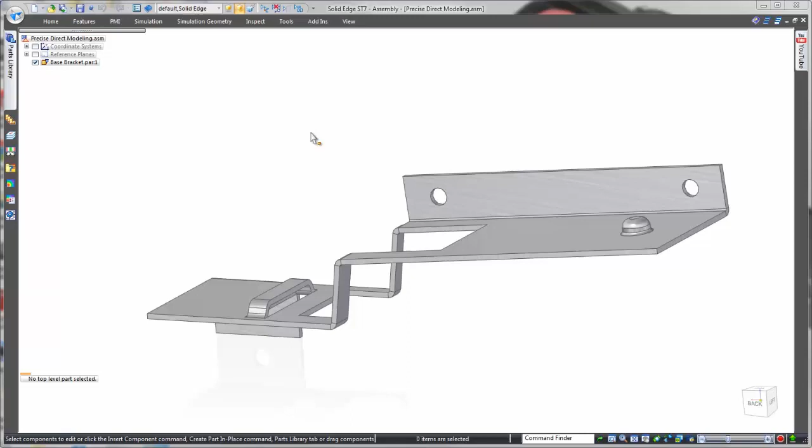So you've seen how Solid Edge with Synchronous technology allows us to rapidly create initial designs. That's the beauty of direct modeling. But what about finalizing that design with precision parametric work? Synchronous technology gives you the best of both worlds: fast direct modeling and precise control.

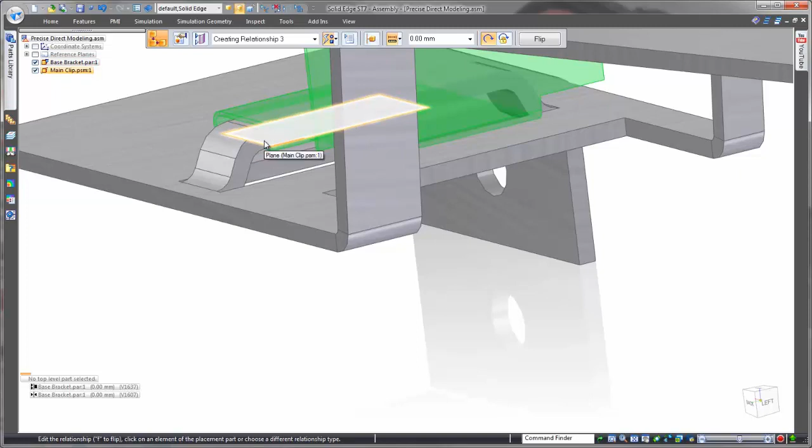Here we'll take our spring clip concept and ensure it fits and ready it for its detailed drawing. Let's take a look at how this will work inside Solid Edge.

Here we can assemble this clip to our base part simply by selecting a few faces. Simple drag and drop, and Solid Edge knows what to do next. Definitely a time saver when working with hundreds of components. I have this roughly where it needs to be. I can come back and get this exact when I start seeing the bigger picture.

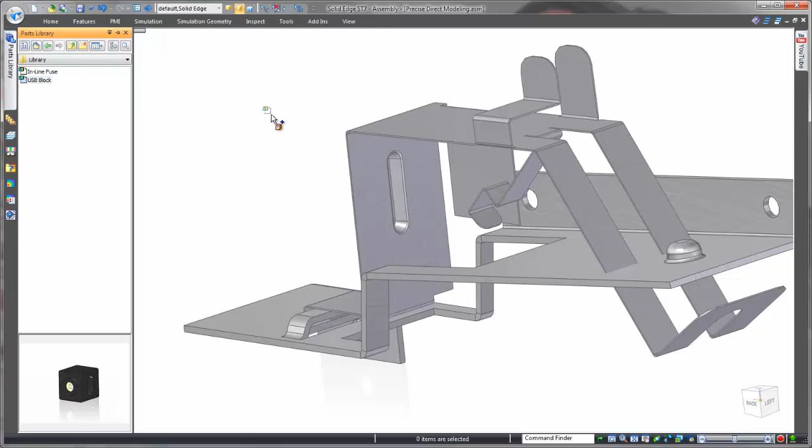Here we need to assemble this USB block so we can tell just how much change we need to make to the clip. Notice all the nice visual feedback Solid Edge is giving me when selecting faces and axis of cylinders.

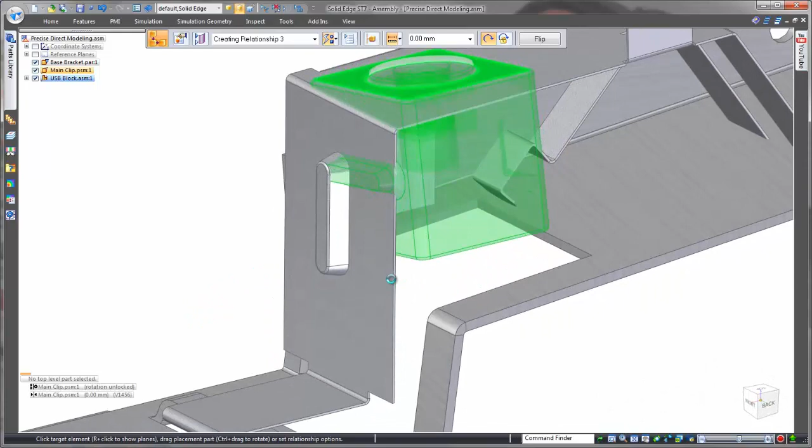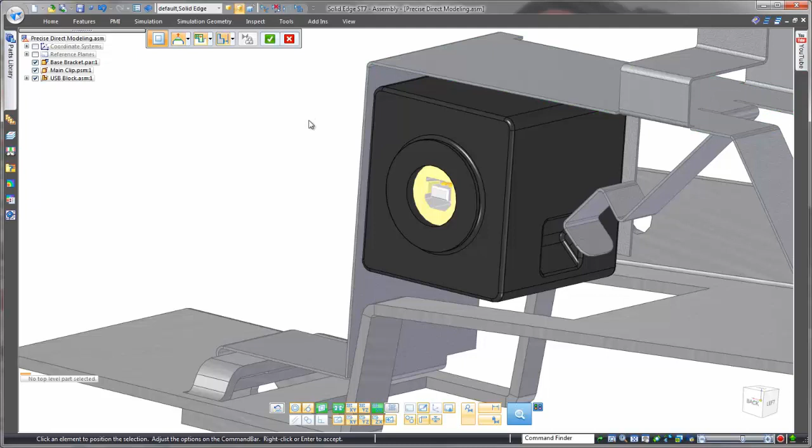The first precise change we need to make is to close up this gap between the top of the USB block and the underside face of the clip. In most other CAD systems, you'd have to make this change at the 2D sketch level with sketch relations. In Solid Edge, this isn't the case. We can relate faces in 3D instead. Here we'll add a coplanar relationship to close the gap. Easy, and now it's just how we do it.

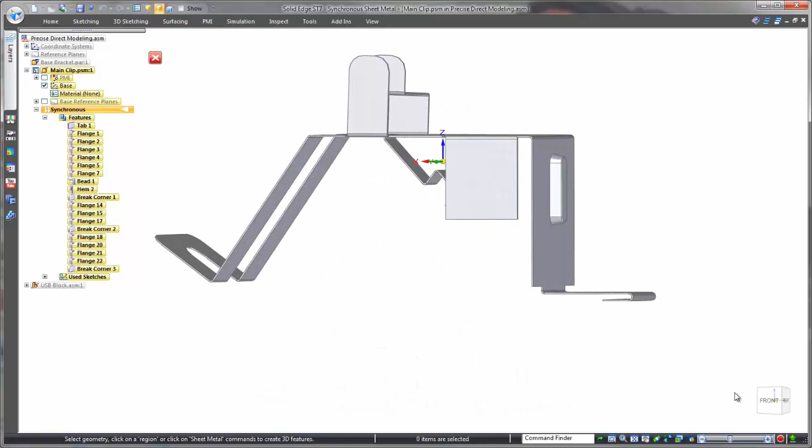Looking at the back, I notice the tabs on the top are not square to the top face of the part. No problem. A perpendicular relation will fix this small problem.

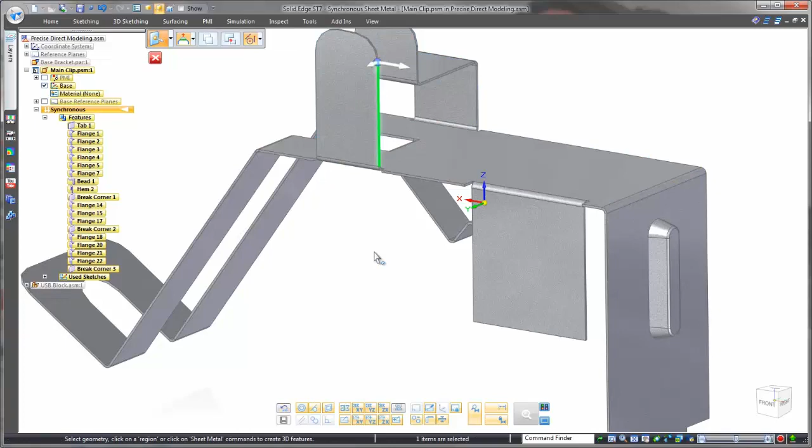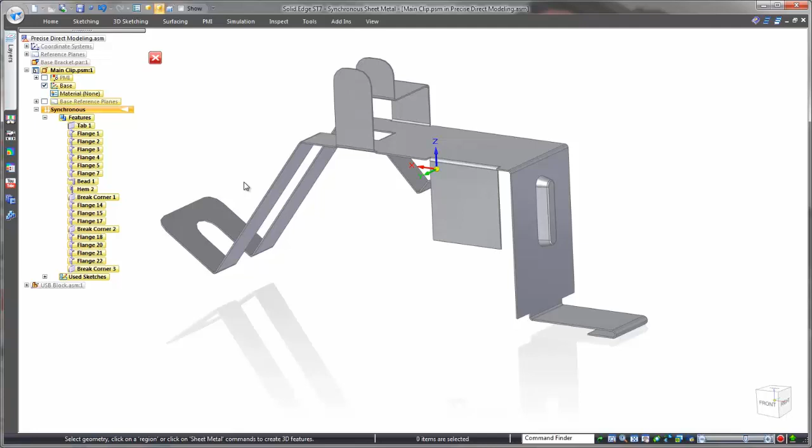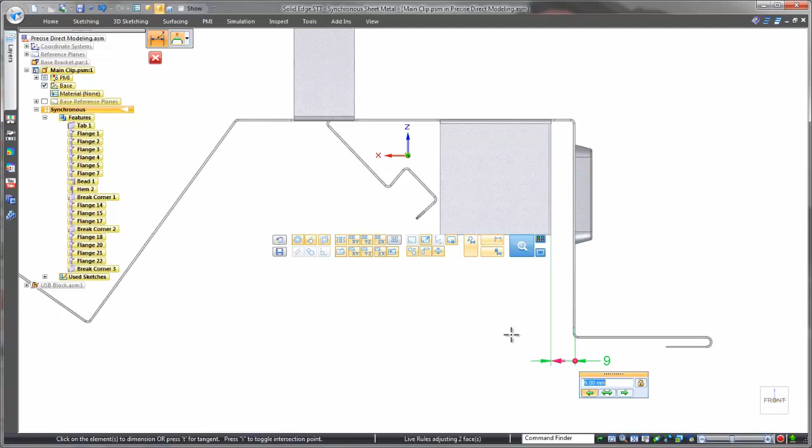Let's start detailing this model, and of course dimensions are key here. Solid Edge has two different ways to add dimensions. The first is like most other CAD systems, where you add sketch dimensions when creating the sketch. The second, however, is unlike other CAD systems and much more intuitive. Just add the dimensions directly to the model like you see here. A dimension can be locked to maintain that aspect of the design, or left floating so that we still have flexibility for further design changes. We'll lock this one down.

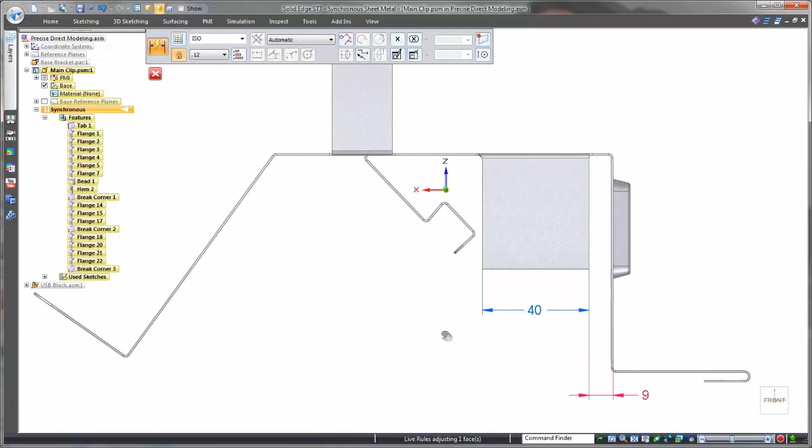The arrows allow us to control the direction of the change, and what face or faces will move with that dimension. We'll add another dimension to our other tab and lock it down.

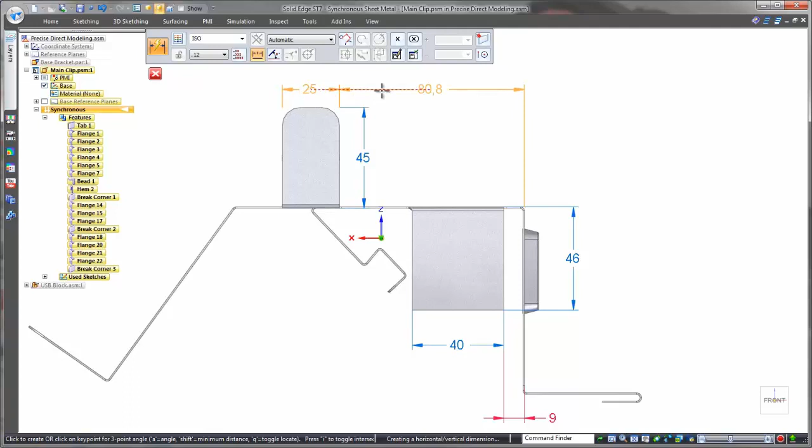Notice as we place this next dimension and change the value, the tab remains at the width we set it. We'll continue detailing our design with a few more dimensions. And it's not just linear dimensions. Let's detail an angle here.

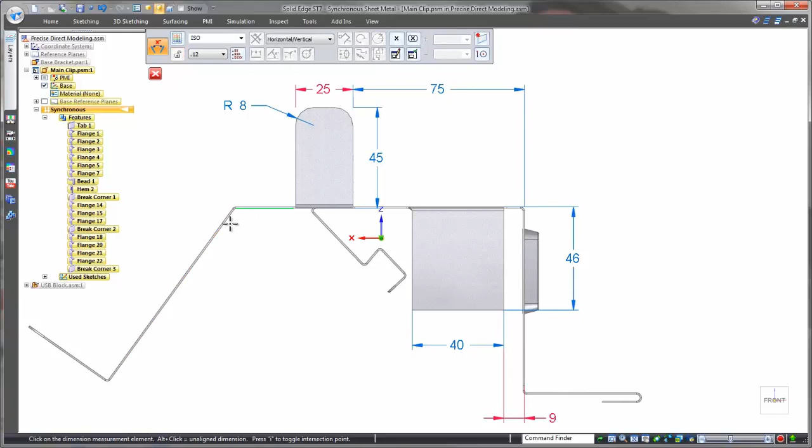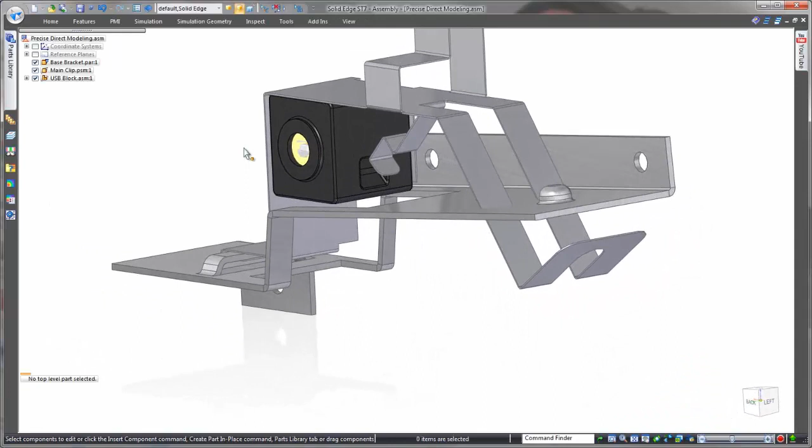All of these dimensioning tools are fast, easy to use, and most importantly precise. What's more, anyone can understand them when it comes to a review.

At this point, we need to finish working on the other end of the clip. Another 3D relation will do the trick to move and match the angle of the bracket. This tool that you see on the screen is called a steering wheel.

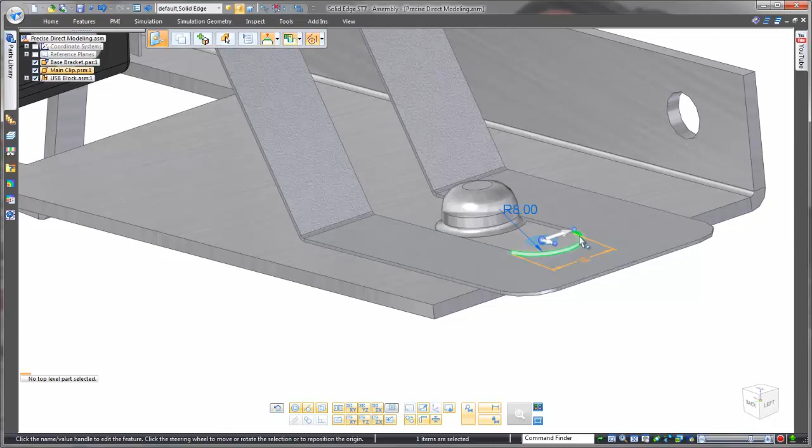With this, we can drag and drop these faces, accurately snapping them into place around the dimple. The final assembly relationship we need to lock the clip down is to line up the center of the slot to the center of the dimple.

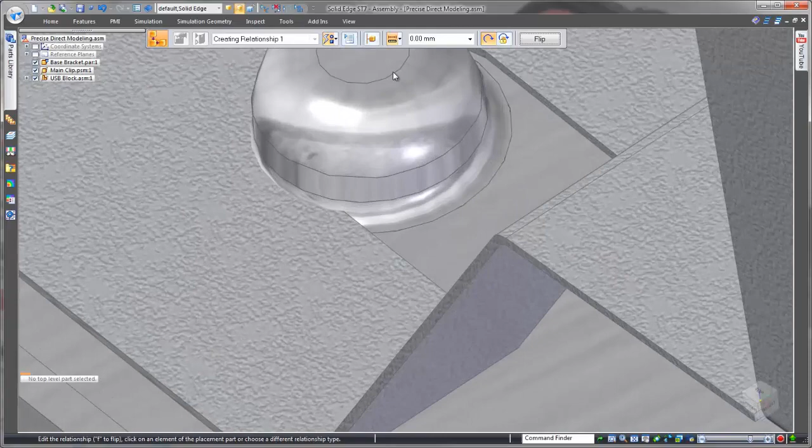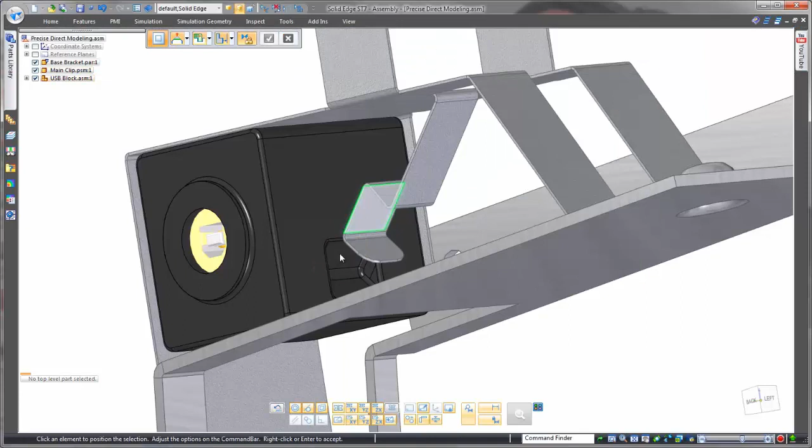This spring clip needs to fit inside the groove of the USB block to hold it into place. Once again, a simple 3D relation between the faces allows them to line up precisely. To get the jog of the clip to line up, we could add the same type of relationship, or how about just a simple drag and snap using the steering wheel?

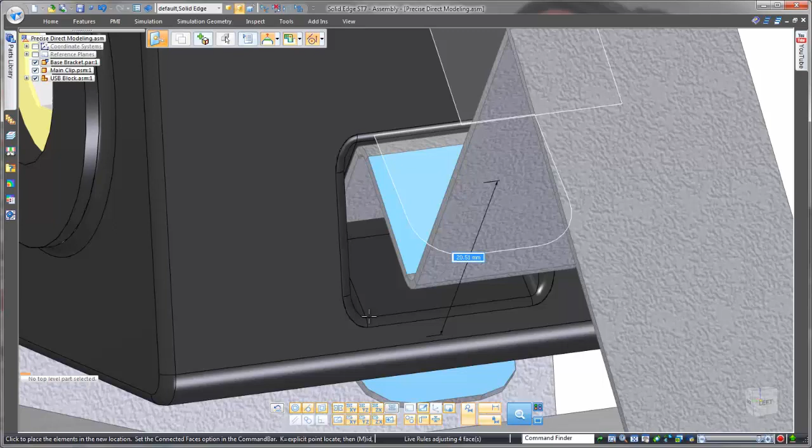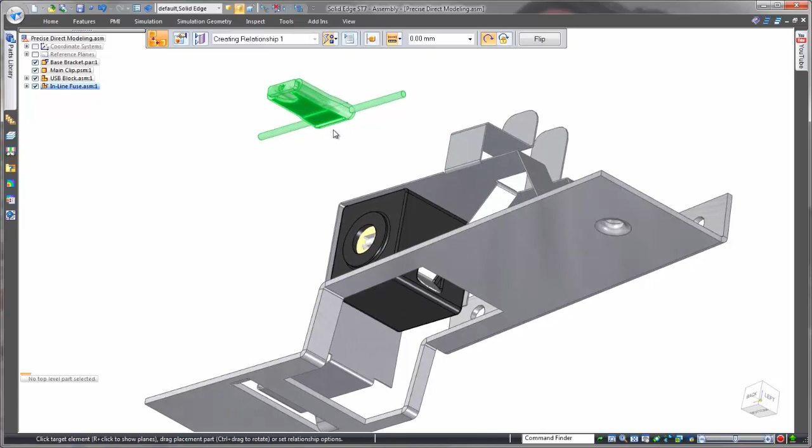One last subassembly to bring in is the inline fuse assembly. The tabs on the top of the clip will support the inline fuse, so we need to make sure it will fit tightly into place.

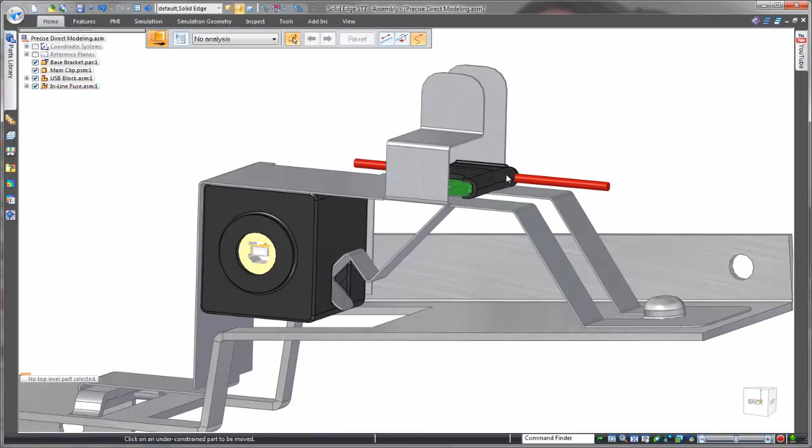Just like we saw earlier, putting parts together is easy in Solid Edge. Select the face, edge, or axis from one part and the same type selection on the other part, and they just go together. The side-to-side movement is not that important, so we can just drag it to a rough location.

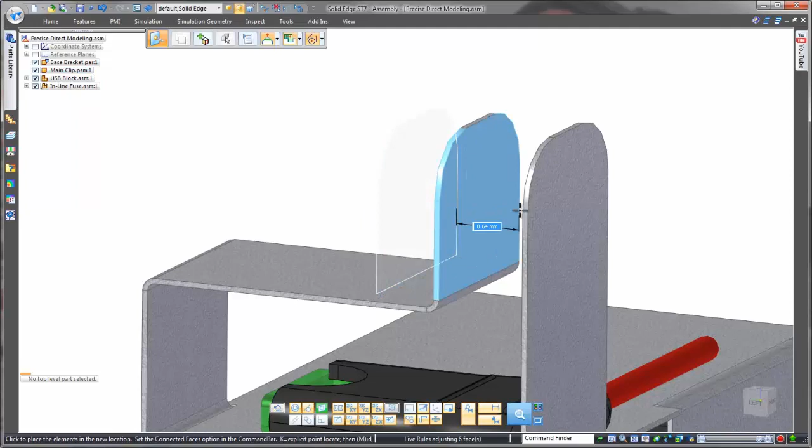I know the wire diameter is less than 3 millimeters, so using the steering wheel we can create a 3 millimeter offset from the selected face before snapping it to the other tabbed face. This leaves us with a 3 millimeter gap, precisely how we want it.

This area is too wide. A drag and snap to the end of the fuse will work.

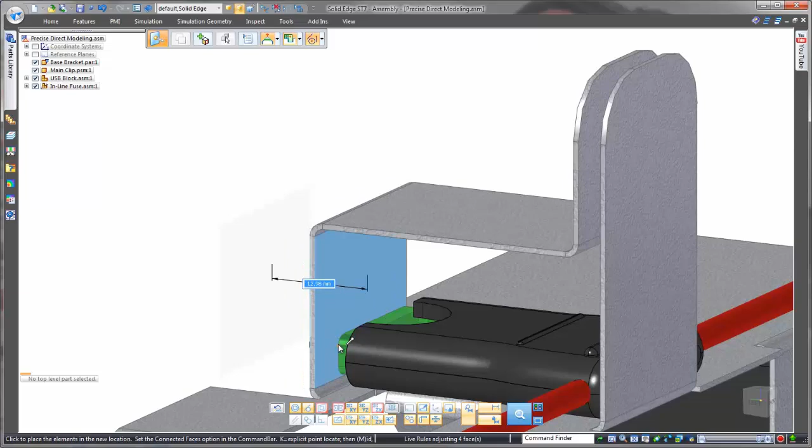For dimensional control here, we can design to the inside or outside. It doesn't matter which one we change, Solid Edge will always take into consideration the material thickness.

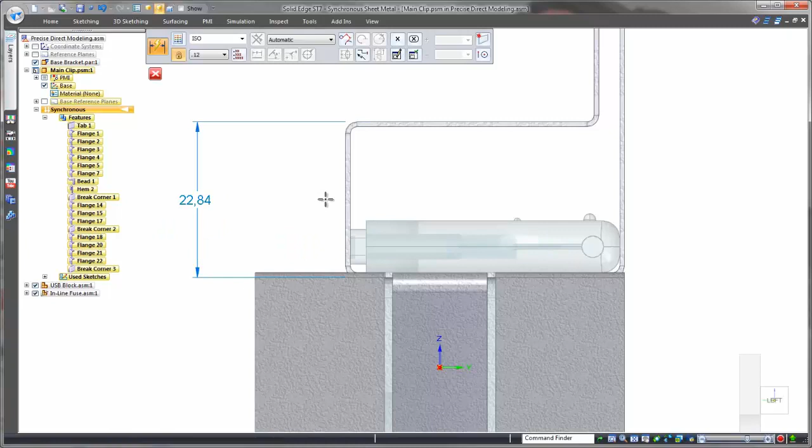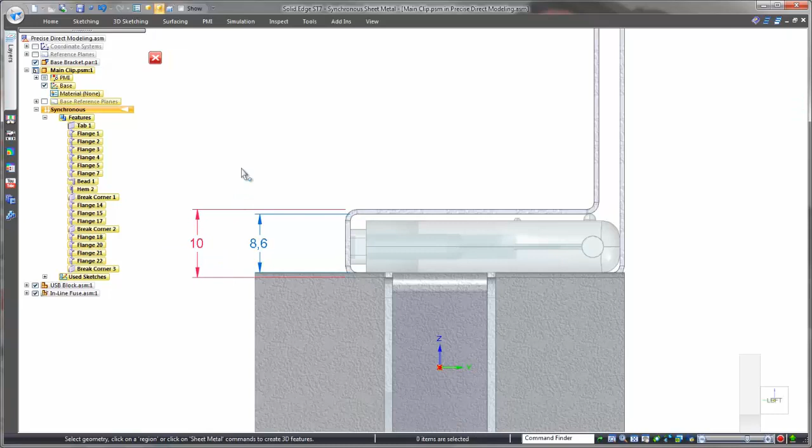This outside dimension, I'll just take the default value. Now let's place a dimension to the inside. This dimension needs a value of 9 millimeters, and if you notice, the outside dimension has updated to the thickness difference. Or I really want the outside dimension to be 10 millimeters, so we can change it and let the inside reflect the thickness value. The 10 millimeters is an important part of my design intent, so we will lock that dimension.

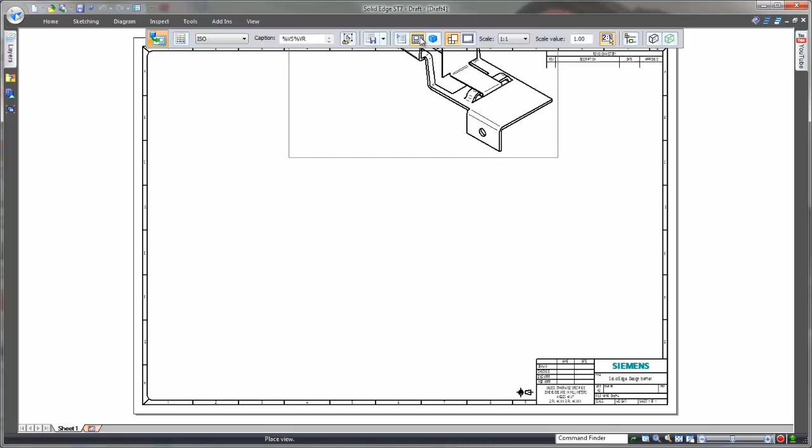Let's start creating a drawing ready for manufacture. First of all, let's create a custom view of the assembly so that all aspects of the part can be seen. And let's have that shaded.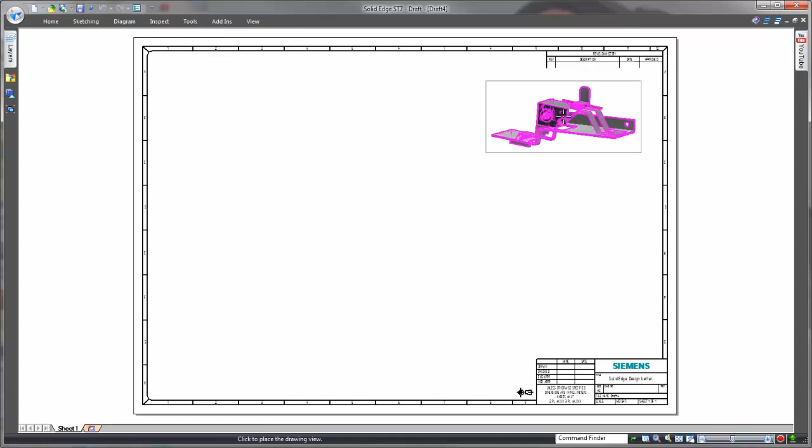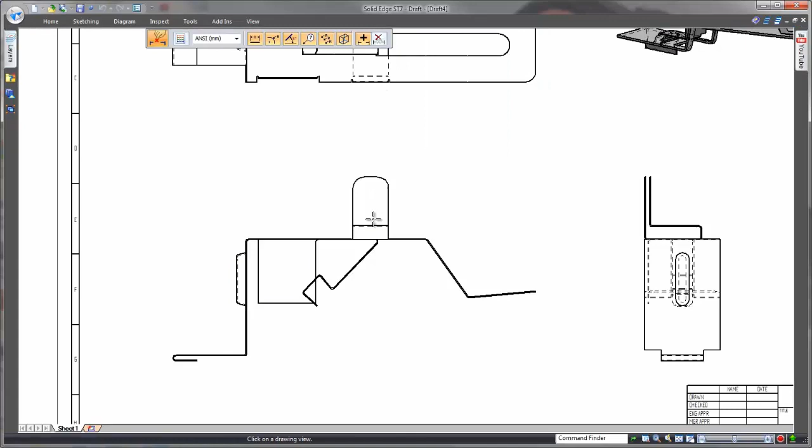Now let's place a few views of just the clip. Remember the 3D dimensions we added at the part? Watch how fast I can bring those into this view.

What we've seen here is how Solid Edge with Synchronous technology gives you the best of both worlds: fast, direct modeling and precise parametric control. Relating faces together, dimensioning with design intent control, and drag and snap editing, all in 3D. No sketch work in sight. Fast and easy, but most importantly, accurate.